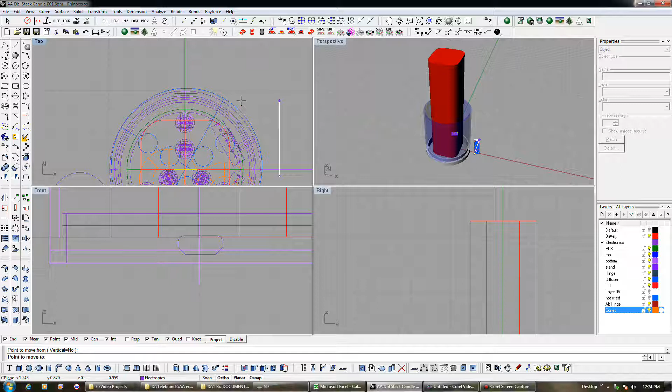There's a ring, what the hell's this? Oh, I guess our diffuser had slipped. I got carried away with it. Let me recenter it. I don't know if that recentered it, because I don't think I centered on it.

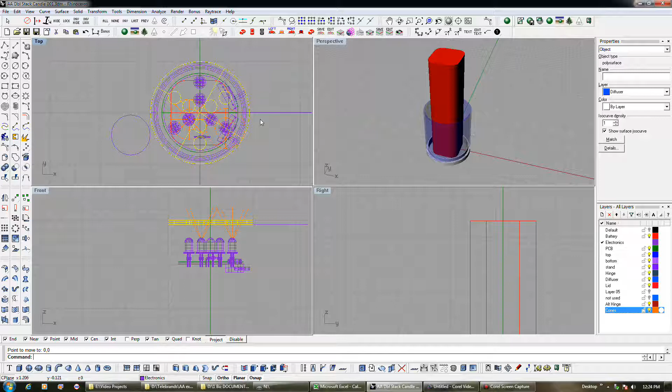There we go. Alright, now it's aligned.

Alright, so I put our little profile right there. Now the question is, that would be the inner wall thickness, and this is the other reason the wall's got to be thick too, because I got to put this little track guide in it.

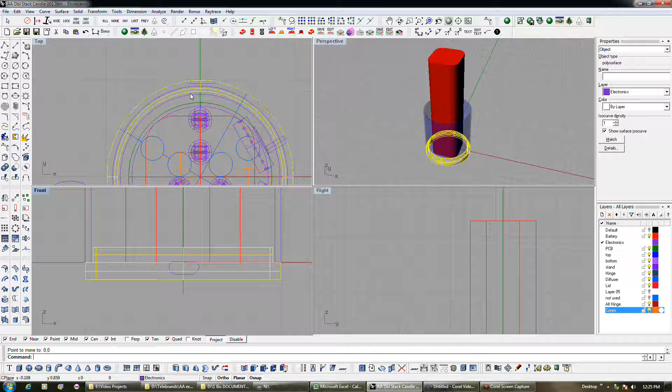You can see where our inner wall of our ring comes to, but this track, we need to extend into this way, and I'm going to try to keep everything straight, but I don't know, I mean I might want to make it curved. Might want the inner part to be curved, in which case I may want this to be curved as well, but we'll deal with that in a minute.

Okay, so this circle here represents the inner wall. We don't want it going in that far, because it would basically be penetrating the tube. And this circle here, if you recall, is the outer wall. So pay attention to the edge right here where the cursor is. That's the critical part, because again, I'm going to go ahead and pull a curve on this.

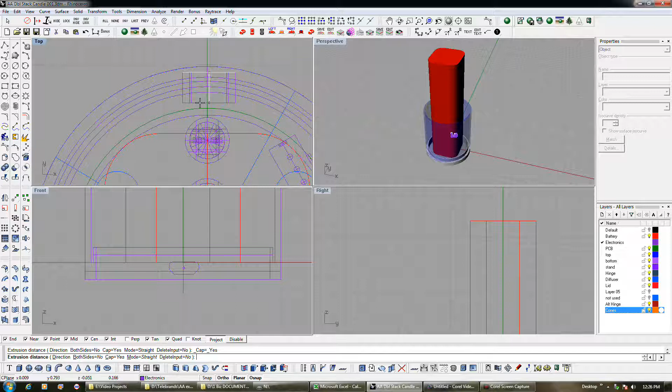So we got to have some tolerance to it. But we want, see the distance here, from here to here, 79 mil to 109 mil. So that's like 30 mil, right? We want this to be certainly greater than 30 mil, in case...

For example, if we did actually go into production and they made it precisely this way, we wouldn't need this loose of a tolerance on it, if we went and had this injection molded. But let's say we did, for some reason or another. We want this distance right from here to here to be greater than this distance from here to here, so the thing at least won't come out of its track.

Because the fact of the matter is this cylinder here will probably be fatter than this, by, for example, something like that. That might be the actual distance, and this will probably be thinner than this by a similar amount. So this could be our actual clearances on the 3D printed part.

However, if we went to production with this, well, this might be the actual clearance, which is 30 mil. Well, remember, it's actually 60 mil because this can actually come out, from side to side. So this could come out of the track, if we're not careful.

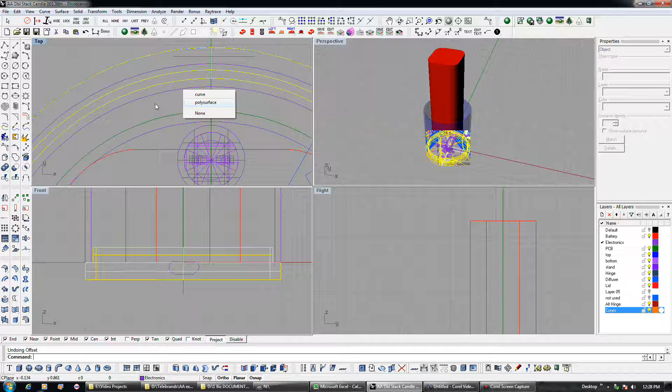So we want to make this part here extend as deep into this as possible, to account for that. So for a 3D printed part it might work fine, but for a production part, if we just willy-nilly either forgot to change it later, or this was some different area of the design and we really couldn't take the risk of changing it for some reason, we want to make sure that we got as much of a tolerance here as possible.

That means this needs to come as deep into this as we can. So given the fact that we're looking at something along this line here, and this is the outer, this circle here represents the outer shell. Okay, notice I'm looking at our measurement down here.

60 mil, it had to come this deep just to handle these possible clearance errors that could cause something to slip out. Because if this inner tube was shifted another 30 mil this direction, this thing would come out if it was only 60, less than 60 mil wide. But we need it greater than 60 mil, so it needs to come at least 75 mil or so.

So it needs to come at least, what the hell?

It needs to be at least that long. So basically, let's extrude it to that, and my little constraint here is where you set the constraints on it. This means it snaps to the end, that's where you set your snaps. That's near, that's point, that's the middle, so we'll find the middle of something like where we're at right there. At any rate, I'm using my end snap to snap to the end of that line we made.

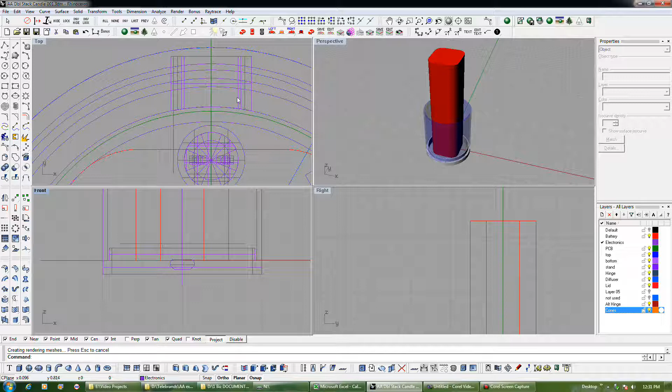Alright, so what I did was let me get rid of this battery. I created a slight curvature in that face there, so it follows the curvature of this.

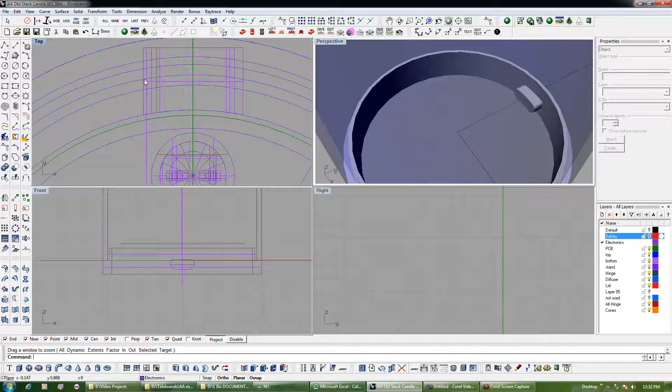But remember, we're still going to need tolerances even on this. It actually doesn't have to, I didn't realize that, because what we really need is we need it to be over 60 mil from here, actually.

If you press control, it turns those snaps off so they don't get in the way. But actually, it needs to be like 60 mil from here, not 60 mil from the other dimension, so we can actually go in that far right there. It doesn't need to come in as far as we have it. So let me go ahead and redo that circle with that in mind.

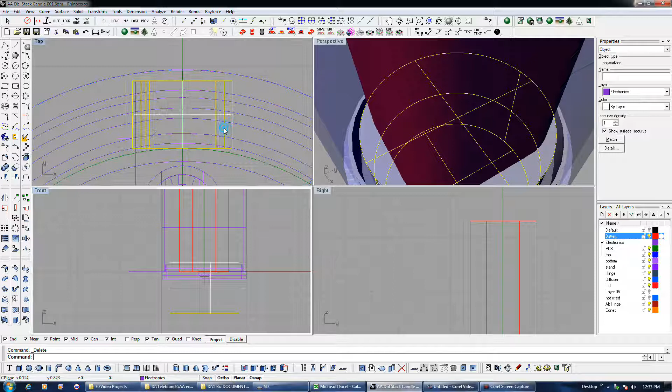Take that and subtract it from this. I don't need this one anymore. To move it up, okay, there we go, I don't need this anymore, or that.

Okay, so that'll put us in pretty good shape right there, because remember, if this circle were to move down here in a production design, this would still be captured inside the housing. It would not come out of its track, and that's what I'm trying to make sure of here. Let me try to figure out what that is.

That's nothing we need. So okay, that gets that done. I'm going to delete that, we don't need it right now. But we are going to need a...

When we do our track, our track is going to have like a 25 mil or so, or really 30 mil, the same as this. It's going to have a tolerance for error in it, so it's going to have to be along the lines of that.

This was the inner wall of our thing, which if you recall comes there. I don't remember what this circle was, so I don't think we need it anymore. But this right here...

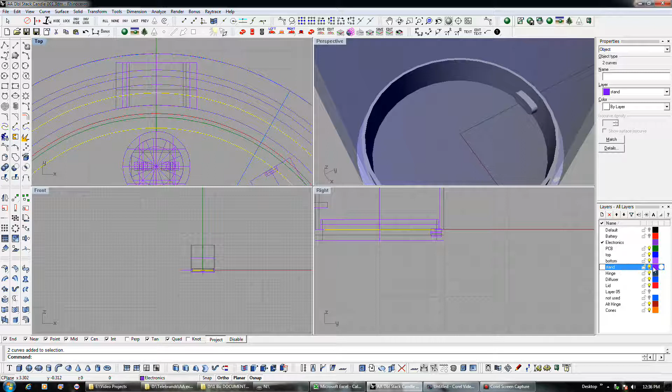In fact, I'm going to go ahead and move these. I've got to rename these layers. Well, let's see, maybe do something like that. So that'll be our... we'll call it, I don't know, upper housing, because I get all these things arbitrarily named here. Call this lower housing.

And I know we're going to have a top, so we're going to have a top, and there'll probably be some kind of an electronics interior too. So do something like that. I'll go ahead and turn off that circuit board.

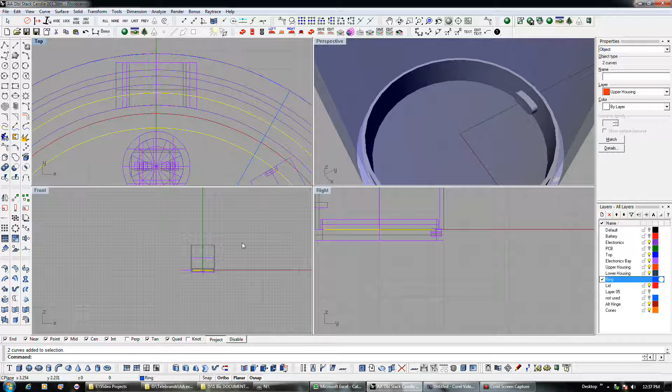Well, this is the ring. Okay, so that's what we're going to be working on right now, is the ring. That there and that there. Okay, and then let me take this and we'll stick it on this lid layer here, because that actually is the lid.

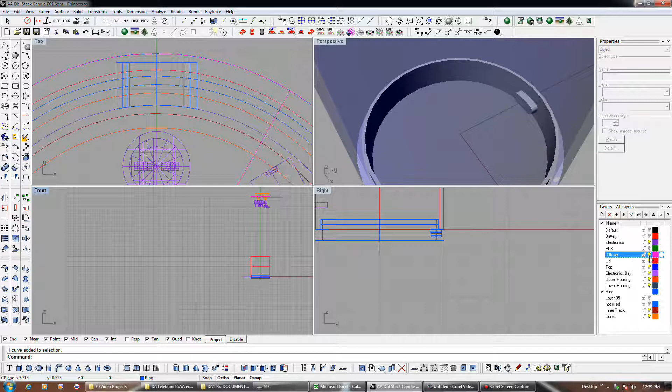That inner track, let me start a new layer here. Call this diffuser. We'll move that to the diffuser layer, and let's get our basic layer structure set up there. So that way, if I want the diffuser out of the way,

or the lid out of the way, I can just hide that layer. So while I'm at it, let's get back to the issue of why we got to put this part on the bottom here. If we were to print this layer by layer, it starts from the bottom, and it'd be trying to print this overhang in midair, and it can't do that. Without some kind of support structure built onto it, which is a recipe for disaster with an untweaked printer, or without there being some kind of chamfer or something under it.

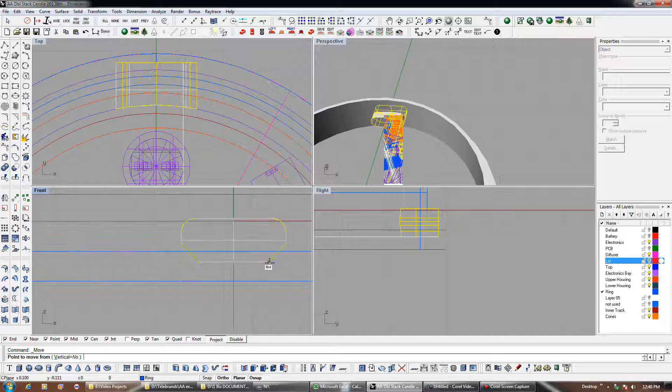But this is why I've got to take this sucker here and move it to the very bottom, because the printer cannot print in midair. Let me get rid of this outline. Anyway, but that is the thing we're looking for, the shape we're looking for.

So let me go in here and create a polar array. Delete this, we don't need it. So we got 3 of those, and let me go ahead and grab these and see if I can weld them together. Alright.

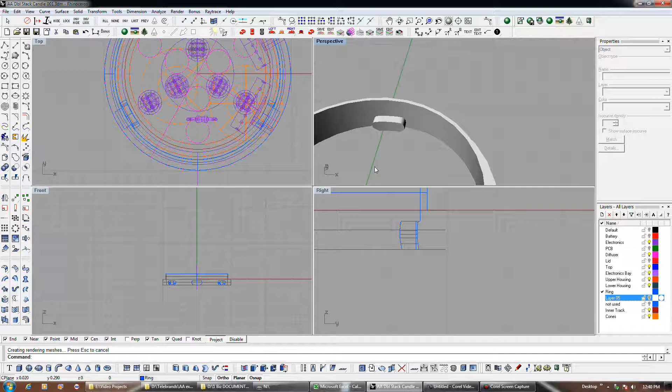Because these need to be, you know, when you generate your STL files for 3D printing, they've got to be one part, otherwise the thing just doesn't quite work right. It'll confuse the printer. I couldn't just leave these as independent parts, because if I did, the 3D printer would actually be trying to print inside of this other part while it's trying to print this part.

So, needless to say, it would really cause chaos. That's why I got to use these Boolean operations to try to form this. Any part we make is a single part while you're 3D printing it, because otherwise you can run into trouble on your print.

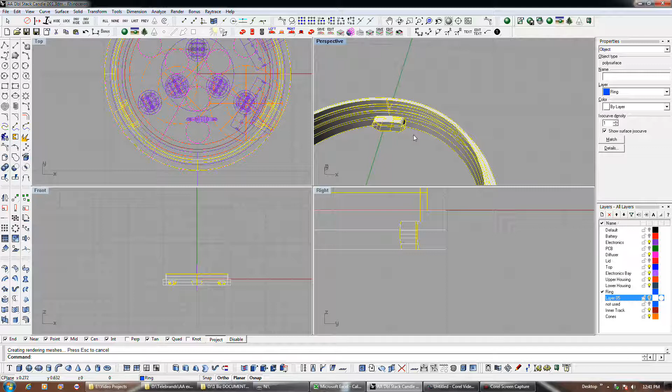That's why anytime you're printing a part, let me go back and show you this, just to be clear. If I just left this as it is, you have this part and this part, you may import it into your 3D printer file and everything looks good to go, but in fact you've got these 3 separate parts here, here, here, and here, plus this ring, they're actually overlapping each other.

So this thing, we treat this as a separate part and go try to print the thing, not realizing that it's actually running into another part while it's doing it, and try to print this, so you end up getting more plastic built up here than is supposed to be here. So basically it's going to end up gooping everything up, and it'll probably make your 3D print fail.

That's why thinking ahead about how a 3D printer works is very important, because that's why I've yet to have a failed print, even though I'm relatively still new to 3D printing, because I'm thinking about the process when I'm doing my designs. The only failed print I had was that blue thing I printed out that time, and that's because the filament was bad.

But this is a surefire way. If you want a failed print, do it like this without combining these into a single part. If you do, you're almost certainly going to have a failed print, because it's going to be trying to print 4 overlapping parts on each other, and you don't want that.

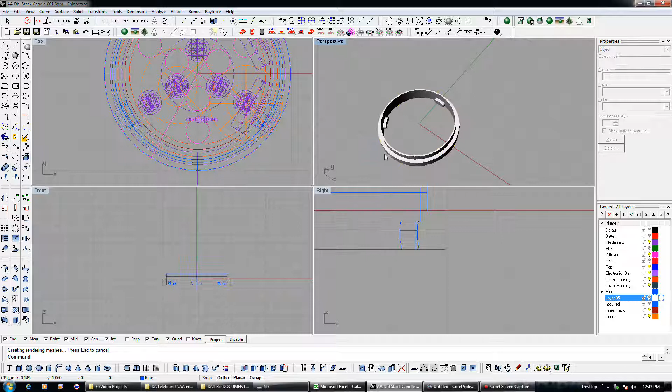But see, this way, it's no longer got that overlap you can see that we had before. So it's treated as a single part, so when you generate your STL file, it's just going to have a single part. It's not going to try to print one part overlapping another one.

It's like some of those sci-fi movies, when you see something materialize inside of something else, well, it's not supposed to do that. So all kinds of bad things happen, and I'd imagine with a 3D print it could, because I don't think most of the software is intelligent enough to realize that.

I could be wrong, though. It might actually do it just fine, but to me, my instincts tell me that could be a big problem if you just imported it like that. By all means, you're welcome to try, but it could create a real mess, if you don't want to do Boolean operations for some reason. Either you don't have the software for it or whatever.

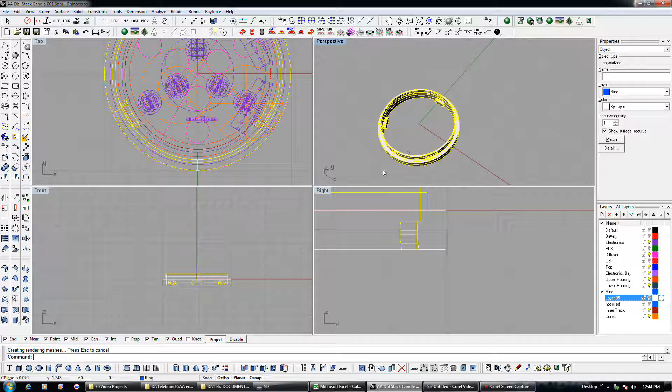But it's just a good idea that anything you print be a single piece. From a digital standpoint, it'd be a single piece. So anyway, that pretty much gets us our holder. We've got our 3 guides for our forthcoming track and the housing. We got our containment for our cylinder here. So that's pretty much what we needed, and we do have our LEDs all laid out in the rough pattern we're seeking, and our diffuser more or less taken care of. So again, that gets us going on it.